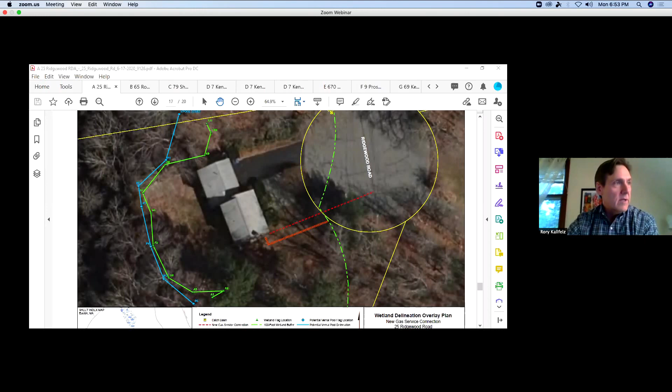I'm not seeing anything, so I will make a motion to... oh, actually Dane, I assume you want us to close and proceed? Yes, please. Okay, so I'm gonna make a motion to close and issue permit for work in order of conditions for 25 Ridgewood Road.

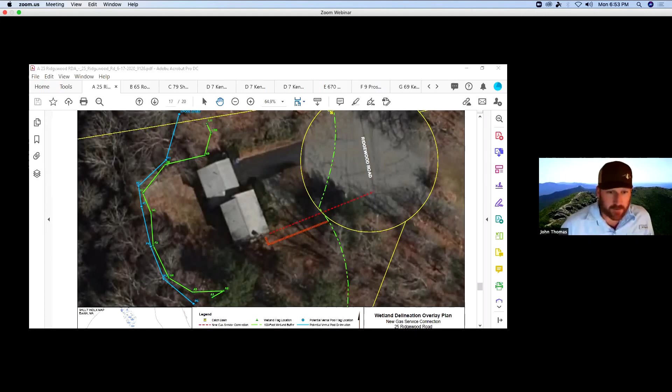Just looking at the staff report to make sure. I'm going to correct you, Rory, and say negative determination. Ah yes, thank you. So make a motion to issue a negative determination of applicability for 25 Ridgewood Road, as proposed.

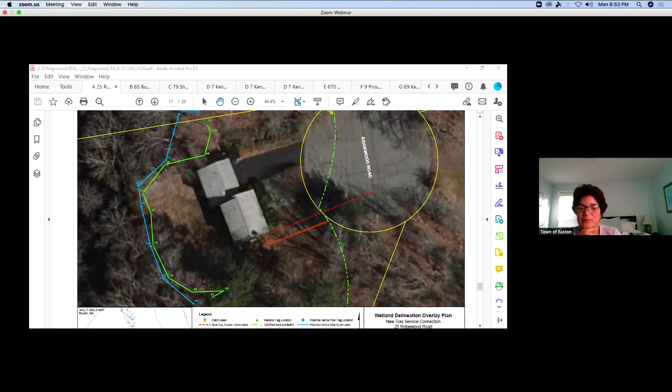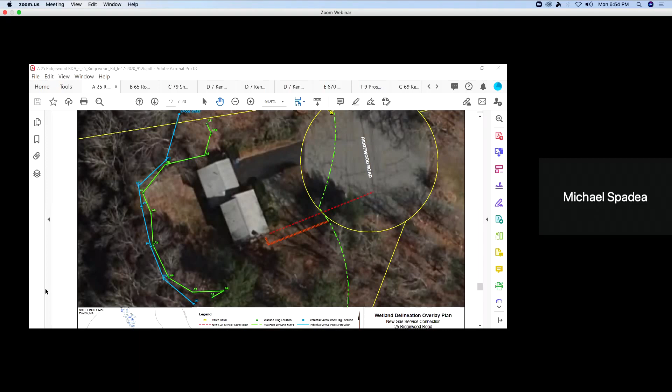Thomas, second. Kallfelz, aye. Spadea, aye. Thomas, aye. Thank you. Thank you very much.

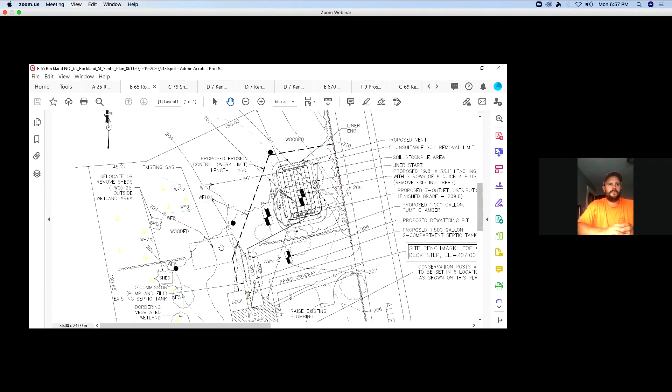That erosion control will contain any migrating materials, preventing it from getting to the resource area. We've also got notes for proposed dewatering areas on our test pit next to the driveway, and we show detail for that on the plan. We've also shown, I believe, a total of 6 conservation posts around the existing tree line in the backyard, mostly, with notes in our standard details listed on the plan. Pretty straightforward septic repair here, everything is outside of the 50-foot buffer. That's all I got for you, I'd be happy to answer any questions.

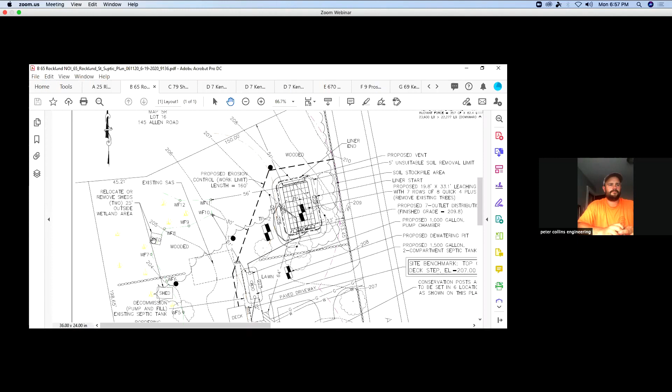So I think there's a note here about 2 sheds that are actually in the wetlands. So the homeowner knows that those need to get relocated. I believe they do, but we'll make sure it happens. Yep. Okay.

Let me let you know for the record that the abutter notifications have been posted to the online application for all of them tonight. Okay. Does any of the commissioners have any questions?

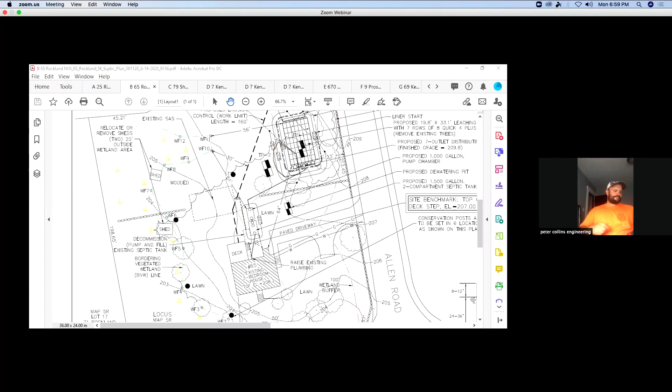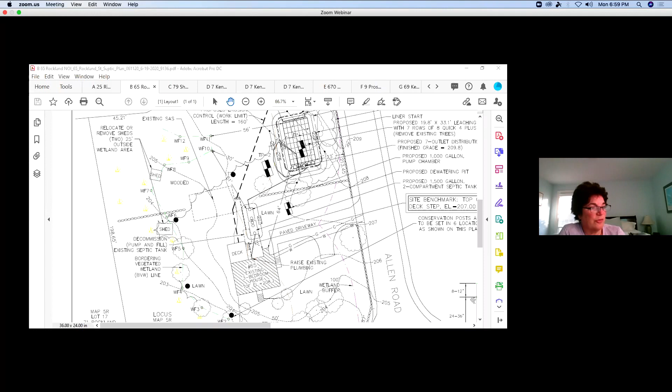I'm going to take a second, while you're watching the list, to note that in the wetland biologist report, she commented that the area of wetland coincides very closely with the lawn, as you can see here in flags 2 through 5, 6. So I'm recommending a condition that any future application shall confirm the wetland boundary by evaluating the soils.

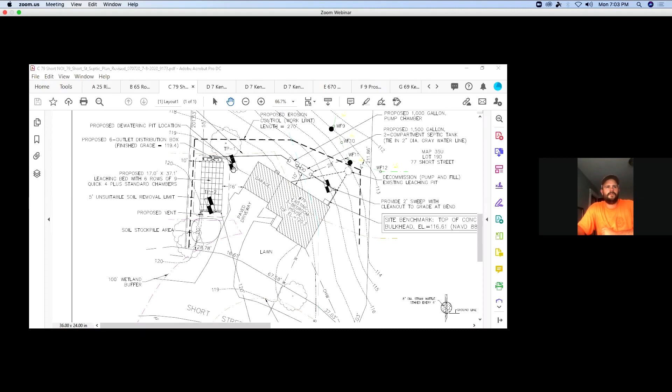With this one, obviously we're kind of contending with the lot lines as well as the house setbacks, but most of all, staying away from the resource area. As proposed, our tanks are located inside the 50-foot buffer. Based on the existing plumbing and the topography, we had to locate the tanks behind the house. Maintaining the minimum 10-foot separation to the foundation, we're kind of sandwiched, and this is where the tanks have to go. It's kind of the only place they can go.

The field, we were able to push a little bit further away from the resource area into the yard. That also helps us out with the grading of the system. There won't be any change in grade over the tanks or the leaching area. All disturbed areas are existing lawn, and they're going to be going back to lawn afterwards. So how it's going to look after the project is exactly how you see it today.

With the exception of a new, I believe it's a stockade fence along the western lot line. I believe that's already in place as of last week, it was under construction. So the installation of that fence is also included in the application. To protect the resource area, we've provided erosion control around the entire project, paralleling the lot lines and going around the entire rear of the house. We have our standard details for that, as well as our conservation post locations, dewatering pit locations, and details shown on the plan.

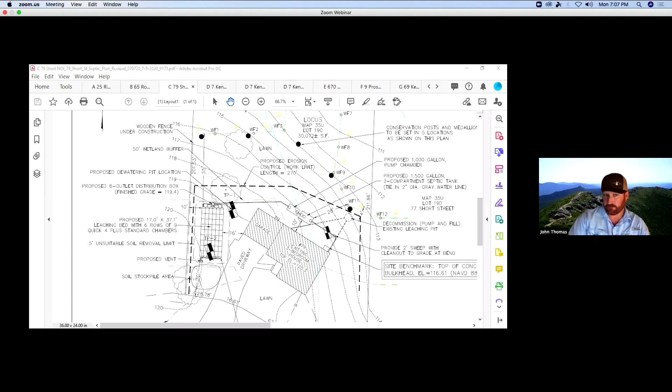And while I get you, I know we have 3 certificates of compliance later in the evening. I know one we are requesting a continuance. Do I need to stick around for Kevin's Way or Summer Street, or are those pretty straightforward? I don't expect you to have any issues with those.

Okay, Andrea, any comments or concerns? No, that'd be fine, I appreciate you continuing 9 Prospect. Okay, alright, if you're all set, I'm going to sign off then.

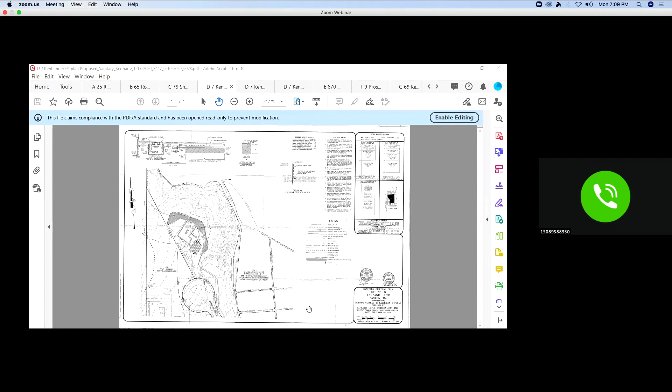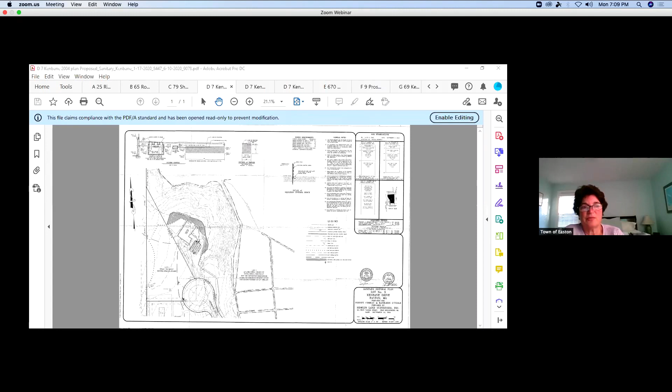Andrea, I'm for 670 Washington Street, the next one, Mike Koska. Thank you. Hello, can you hear me, Ann? Oh, there we are, here you are. Are you here for 670? No, I'm here for 7 Kenbane. Okay, hang tough, we'll bring it up. No, that's what we're doing now. We're doing 7 Kenbane. Okay.

Okay, so I have a bunch of plans already loaded here for you. What's your first name again? I'm sorry, oh yeah, my name is Ben Dowling. I'm an attorney, I represent the Camus O'Toole Family Trust.

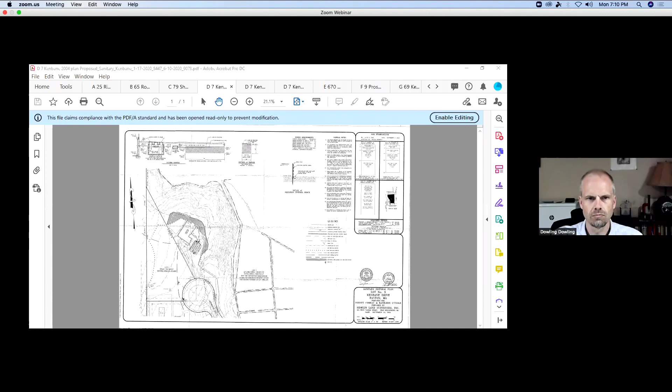Great. We're here on a notice of intent for 7 Kenbane to bring the property into compliance with a notice of intent from 2004. So just to give the commission a little perspective here, the project was originally from 2004, and there was a permit issued, an order of conditions. There was a restoration plan in place, and I don't think they ever closed out the permit, and then they've gone to issue a certificate of compliance, realized they were out of compliance, and so they've come to us to try and get back in compliance with a notice of intent.

So that's why they are here today, knowing that they're out of compliance on a couple of things, and we will talk about what those things are and how we can get them back in compliance.

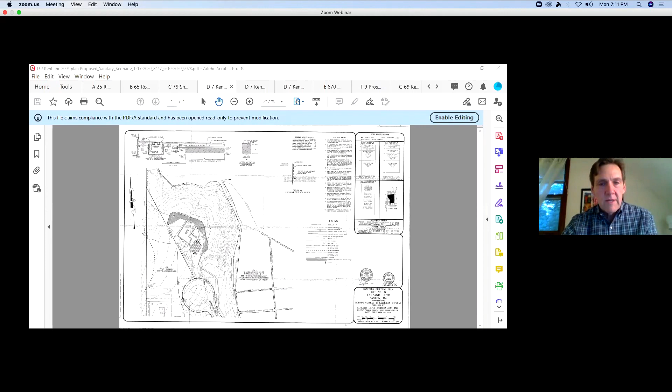So Ben, why don't you tell me what you want to show, what you want me to have up on the screen? It's up to you. I have the original as-built from 2004, the original replication plan, and also the proposed - there's a plan that's been issued now with the current conditions. Great, thank you, that was a very good, concise summary of why I'm here. I think maybe we can focus on the as-built that you have up now.

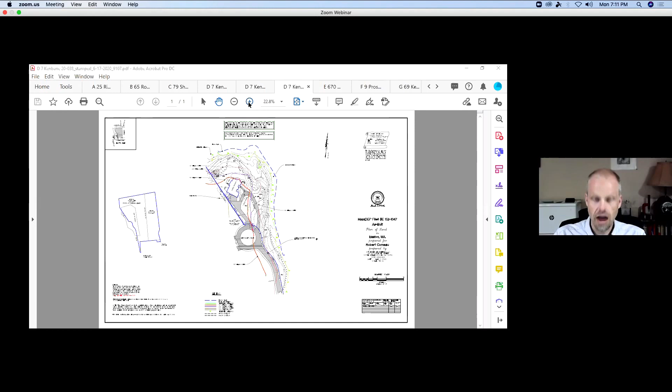Sure, in terms of the areas that are out of compliance, there are some features on the plan - if you zoom in a little bit more, there's a shed and a gazebo that are both on the resource area side of the 50-foot wetland buffer.

And yeah, you're right on where the gazebo is, the shed is to the north. Keep going a little bit there. Yep, there's the shed, there's a water garden to the left of the shed, and there's also a piece of the driveway, and then there's also lawn. Okay, and so the gazebo has been removed at this time.

Wow, that's my understanding. The plan would be to move the shed, obviously outside of the 50-foot buffer.

The proposal would be to make sure that what is happening on the ground is consistent with the original restoration plan, which focused on an area to the south, down in that other direction, all the way towards the bottom, right where there's a lawn. That's where the area of the original restoration was. So we would make sure that area complies with the original restoration plan.

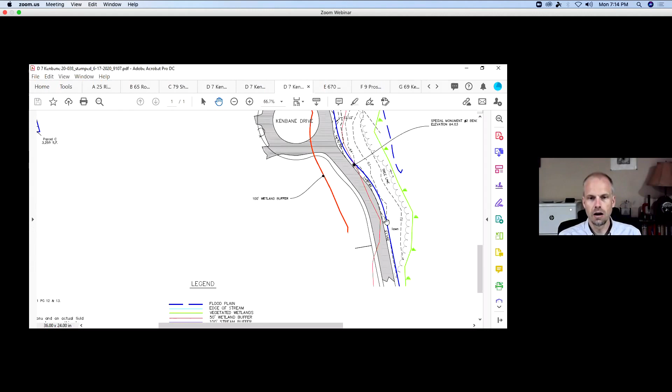And then in terms of the lawn and the water garden, sorry, the proposal would be to abandon the water garden. We're open to guidance from the Conservation Commission on this, but abandoning the water garden seems like it could be the best thing to do here. Again, we're open to your input on that.

And with regard to the lawn, we would propose to have the area behind the 50-foot revert to native vegetation and plantings. The preference would be to allow it to revert, but if there were a more affirmative step you would like us to take, we're open to that as well. So that's broadly what we're coming to you with.

There's a lot there. My understanding is that the DEP has not issued a file number for this yet, so you would not be in a position to vote on this tonight. If we can get on the same page tonight, what I would propose is that between now and the next meeting, hopefully when there's a number and you'd be in a position to vote on a new order of conditions, we will put this plan we're going to develop together in writing so you could vote on it at that time.

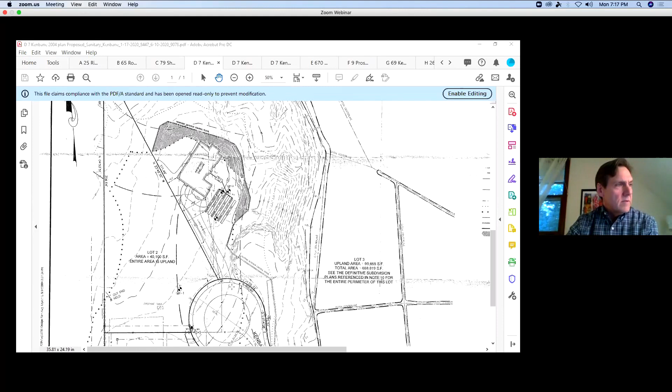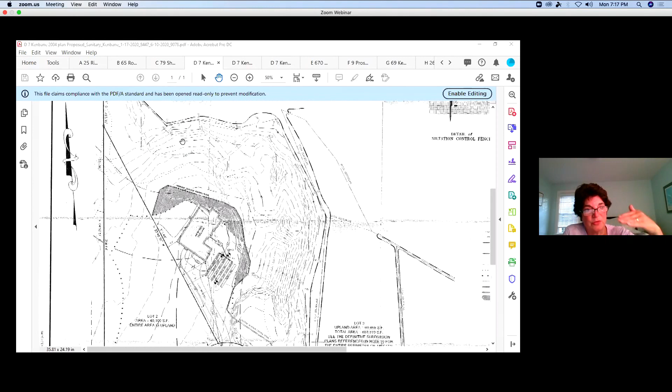Also note on this plan that this siltation fence line is relatively close to the 100-foot stream, 100 feet from the stream. If you were to push your plan a little bit so we could see the north, you'd see that there used to be cartways and stuff down there.

I bring that to your attention because there are two different conditions in the 2004 decision that specifically notified the applicant landowner that there's to be no disturbance beyond the limit of work without further applications.

So I think part of the challenge here is that a significant portion of the area outside the limit of work has been converted to lawn. The notice of intent here, as proposed tonight, is to return it to lawn up to the 50-foot buffer, when the original condition was to not have it extend beyond the actual erosion control at the time, which is closer to the 100-foot buffer.

So that's one challenge. The other challenge is, you know, you talked about the water garden and the shed being moved, but also this driveway. So, is there any input from the commission on what kind of direction we might want to give Mr. Dowling and his client?

I have some other concerns that haven't been discussed yet. It looks like part of the driveway is currently on the septic system. It isn't, it looks like it, but I checked. No, the driveway access to the septic system is through a manhole cover on the driveway. Okay, my mistake.

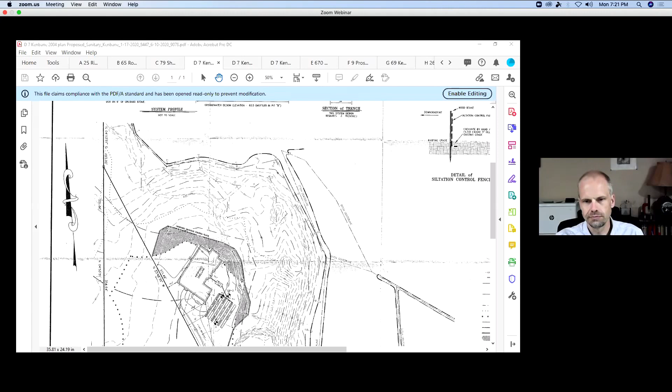I wonder, as you point out, there's this substantial driveway structure that does not appear on the original plan. And I wonder, talking out loud as I say this, if removing that in some way would further the goal of protecting the resource. I'm talking out loud when I say that. Would leaving it as is be less intrusive than going in there and picking it up?

That's kind of how I was feeling. I feel like I'd leave it as is instead of tearing it all up and disturbing it. But I don't know, maybe John or Rory can speak differently on that.

And they did a little bit more work. I think maybe a little bit more mitigation to account for the additional impervious area. It's a big loop, a big green space in the middle of that driveway. Yeah, it is. It is a lot.

That's huge. I think certainly in order to include the driveway in the notice of intent, we'd have to know what the increase in impervious proposed would be, so that we can understand that. I think as John's proposing, in order to offset that, there may be some additional restoration plantings required beyond doing the original restoration planting on the southern side of the property, plus the return of the lawn that's inside the 50-foot to natural state. There may be additional work that's meant to be done here.

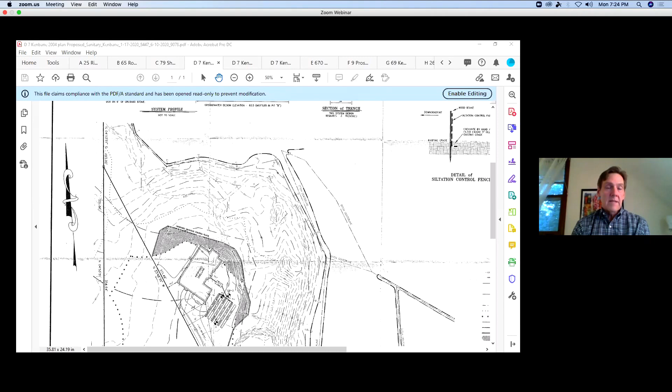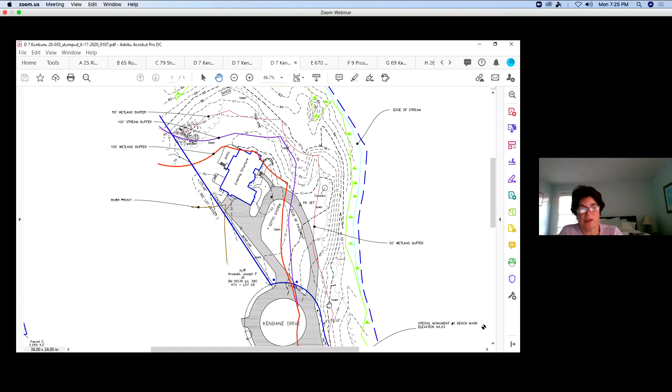Can we go back to the as-built conditions? There's a few areas where lawn comes close, you can see the red line, the lighter red line is the 50-foot. And then there are a few sections where the lawn area comes really close to the tree line, that wiggly line. And there's an area where you're well in, and he's getting closer now where the gazebo is well in the 50. And then down on Kenbane Drive, you've got plenty of lawn.

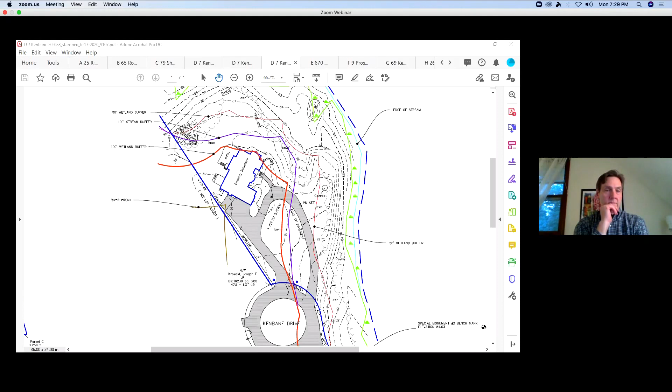So are we looking for a 1-to-1, a 2-to-1 replication here? 2-to-1? Any thoughts from anybody? 2-to-1?

I think it's going to be important to see how much room they have to work with, see the contiguous restoration potential areas along the driveway, and see how much you can build on the existing one that they were proposing, to see what the size of that was, and then see how much room you have to work with. It'd be nice to have one large restoration area rather than splitting them up into two.

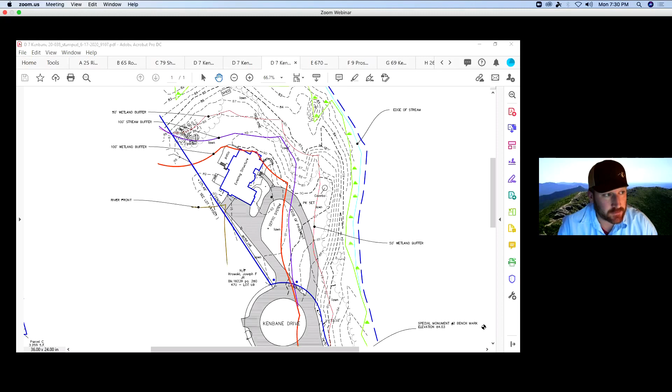So on the existing plan, the restoration area is identified between flags 23 through 25. It doesn't have an area listed, but perhaps in a revised proposal, attorney, you can give us the areal extent of the LEC proposal and then add to that.

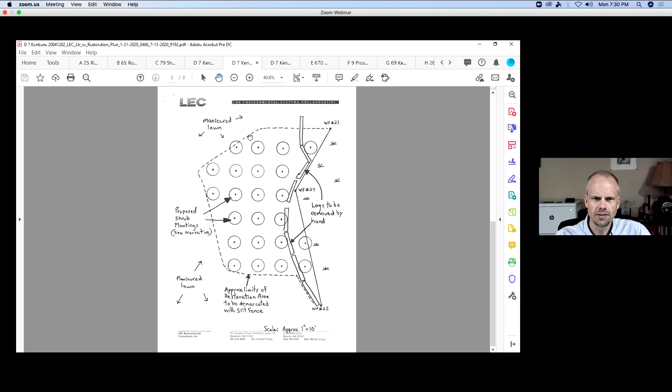Okay, now I was just listening to Mr. Thomas's comment, and I'm wondering - talking out loud here - should the plan be to have the restoration area be contiguous with the old restoration area? We find that they're more successful when you have them all together in a group, rather than trying to sporadically put them in tiny little spots along the property. It's also easier to manage them at the same time. So maybe the plan can be to extend that one.

Yeah, and if it allows it, you might have to do two here. I'm just saying, if you have the availability or space to do one larger system off the original one, then that's what I would suggest doing.

Okay. The area that the LEC plan is in is where the lawn is closest to the wetland line.

I actually haven't been out to this site, so I don't know if there's any potential invasive species on the property, or anything that could potentially be incorporated into a mitigation plan as well. The last thing we want to do for a project like this is remove trees. It looks like the wetlands are interior of the edge of woodlands, so you're probably going to have to look at what sort of species you could put in the understory in the woodlands, and also what you can extend within the existing lawn.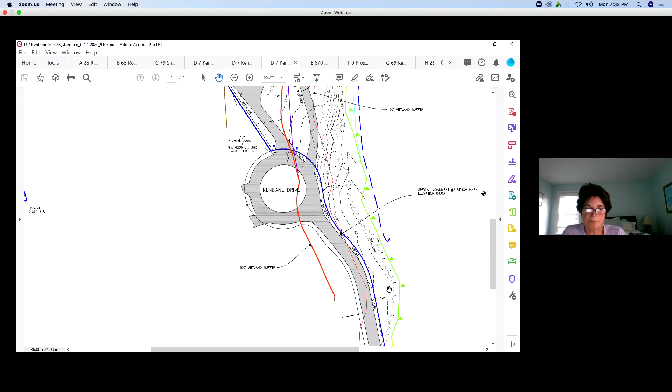Since the restoration area has been cleared out and mowed, whether, as Mr. Attorney Dowling said, maybe the wildlife ate it at first, it's now all lawn. When the decision was made in 2004, this area down here was disturbed, and that's why they put the restoration planting in.

Now, if you go out and take a look at the site, you may find this is the right spot, or maybe it's the spot to the north because of the extensive wetland area. Which one is closer? Would the commission be open to having a wetland professional or one of our better landscape professionals take a look at the site and give a proposal for where the area should be?

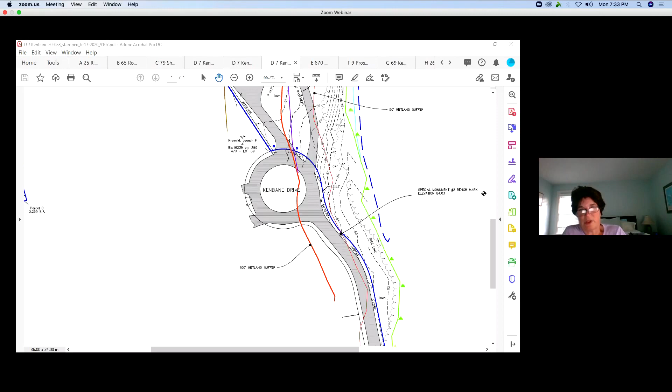I think that's a great idea. I'm open to that. I think the applicant needs to put forth a pretty good plan here to have that driveway be something that we would permit. So you can take that for what it's worth and determine what you want to do. The better the plan you put before us, the more likely we would permit it.

Okay, understood. So just procedurally, will you table this, or hold it? We'll continue this and leave it up to you. We can continue it tonight to our next meeting, which is two weeks off, currently, although we may move that to three weeks off, that may not be enough time for you to get out there. We could move it to the meeting after that, if that helps you.

You tell us what time frame you think you and your client need, and we can continue it to that. We tend not to try and perpetually continue it, but we want a good sense of when you can get it done, so it's not just sitting on the agenda. We can't vote on it tonight anyway, and we could vote with missing information, but that's not how we operate.

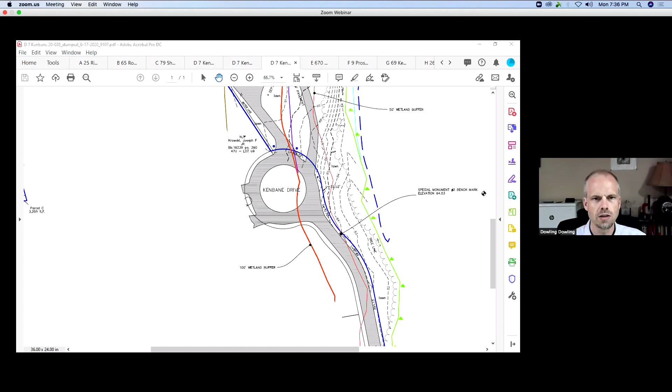So we'll continue to the next meeting, which may be this 27th, or it's currently scheduled for the 27th. If you need to push it off again, we'll push it off again. Okay, sounds great. Do we have any public comment for 7 Kenbane?

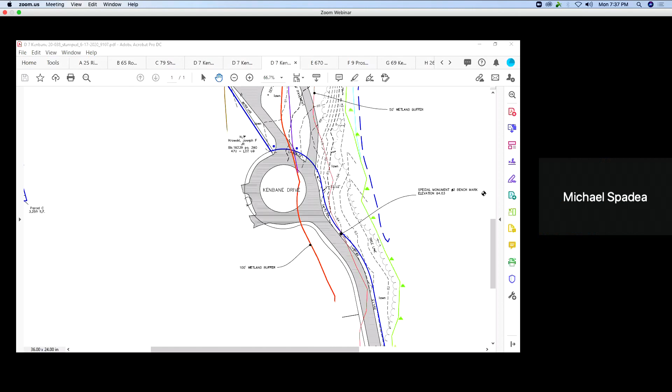Okay, seeing none, I'm going to make a motion to continue 7 Kenbane to our next meeting, July 27th. Spadea, second. Caulfield, aye. Spadea, aye. Thomas, aye. Okay, thank you very much. Thank you, good night, have a good night. Thank you, okay.

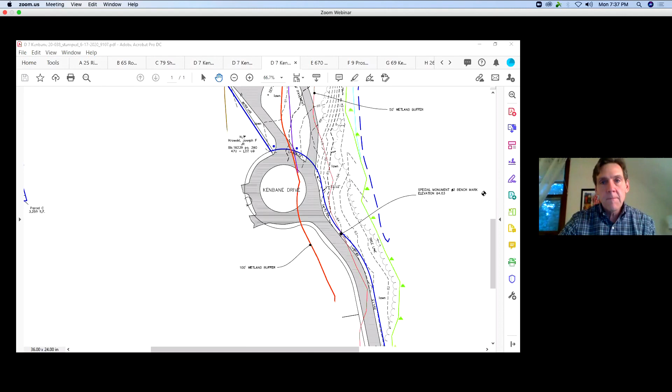So next up is 670 Washington. I think that's this one here. You're 670 Washington, right? Yes, Mr. Chairman, my name is Michael Koska. Okay, welcome, Mr. Chairman, if you want to present at this point.

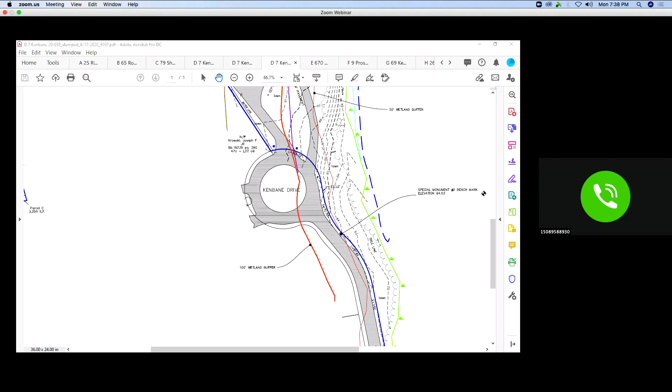Sure, go ahead, we actually have your plan up on the screen if you want to give us some sense. Okay, thank you, Mr. Chairman. For the record, my name is Michael Koska. I'm a registered civil engineer and land surveyor in the Commonwealth of Massachusetts, here representing Mr. Richard Crystal and Frank Tanasso, who are trustees of the Protea Realty Trust at 670 Washington Street in the town of Easton. Their site is located on the northeast corner of the intersection of Depot Street and Washington Street, which is Route 138.

The multi-use building consists of a floral shop and a 2-bedroom apartment on the second floor. The lower level is used to prepare flower arrangements and store flowers in coolers. The second story is the greeting area for clients and display area for the arrangements. And then on top of that is the 2-bedroom apartment.

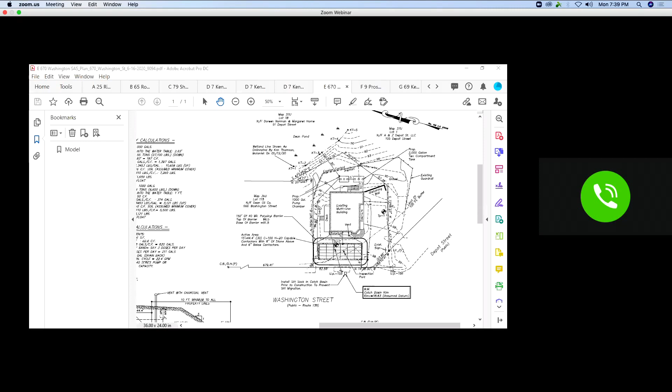We were asked to do a perk test in the presence of the Board of Health. Mr. Mark Taylor was officiating at the site. We did test pit 1 and 2. We found that there was a gas line near test pit 1, so we moved right into the front parking lot.

The plan consists of a 2,000-gallon two-compartment tank into a 1,000-gallon pump chamber. From there, it would be forced to the front parking lot through a 2-inch force main.

The septic system in the front has dimensions of 15 by 44.4 with a 5-foot remove and replace all around, where we found concrete, pipes, rebar, wires—you name it, we found it. And it broke through where I did a perk test, from elevation 54 to 72. So we're removing that material, the dimensions of the system plus 5 feet all around, as per the state code.

Taking care to miss that gas line on the right-hand side, and taking care not to infringe on the property to the north, or left-hand side, as we're looking at the building.

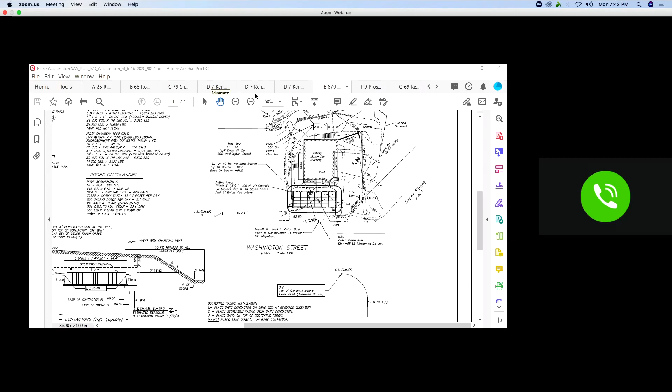It's about a quarter inch between the edge of Washington Street to where the flood zone line is. That's about 125 feet, which is approximately the extremity of the property, where the wetland flags are actually outside of the property, which is owned by Doreen Norman and Margaret Horn, and it's known as Dean Pond.

The floodplain maps also show that there's a dam, showing elevation 96 dropping down to 91. And right where it has the locus, it says Town of Easton 95.4. I do have, from the research that was done on the property, a plan done by Mr. McCann in 1977, registered land surveyor in the Town of Easton, and he shows the dam there. So it makes sense—it reaches a certain level and drops down approximately 5 feet, and the flood zone there is 95.4, probably at the dam crest.

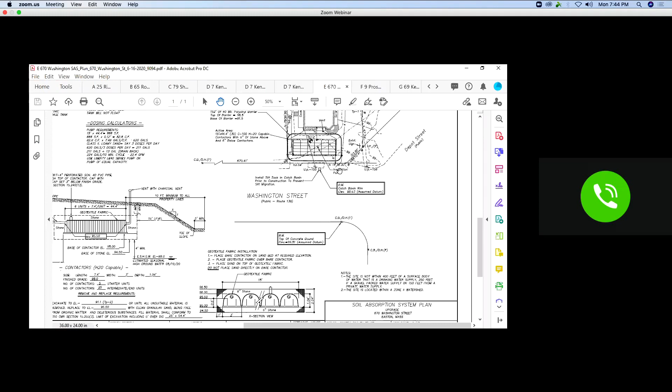So what I'm trying to say is this: even though I'm on assumed datum and not on NAD 1988, I believe that we are outside of the flood zone. However, even if we weren't, I am not proposing any volume increase in that area of the rear of the building.

Let's see, other points - stockpiling. It makes sense to me, members of the commission, that if a contractor was doing this job, there's no room on the site to stockpile, so he'd have to load his truck, take it off site, and keep having a menagerie of trucks until he had to fill the hole with sand, maybe to the halfway point, then continue. So the sand would be dumped into the excavation so he could work further, I would say from south to north.

An impervious barrier was put around the site, although it's going to be below the existing pavement, due to the fact that 20 feet is the minimum distance from a foundation wall to a septic system. We're asking the Board of Health for a variance to 13. As you can see, we're doing the best we can to fit the system into a very small lot, between 6,000 and 7,000 square feet, and hopefully we've done that.

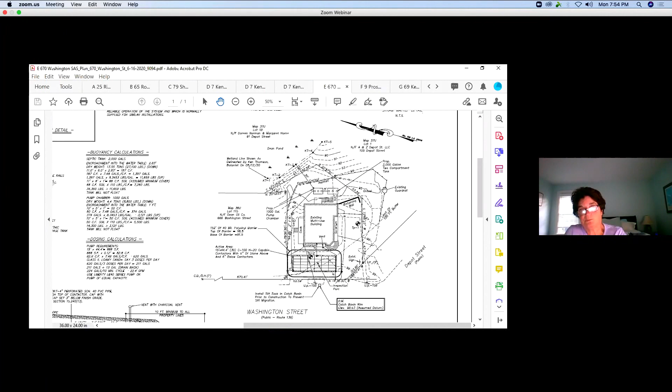Mr. Chairman, that site next door houses Pilling Engineering, and I believe they engineered that plan extending as far as it shows on the natural heritage map, and that it is on NAD 88. I will be more than happy to tie into any benchmark system they have there on NAD 88.

Tie into my benchmarks, which are the catch basin, and there's a bound across Washington Street, and do a conversion from NAD 88 to my datum so we can determine what contour that represents on the plan before you. I am not opposed to doing that if it will clarify things. But like I say,

there will not be any change in elevations in the micro topography in that rear area. What is existing there now, the septic tank and pump chamber, is scheduled from 92.5 on the inlet of the tank to 92.25, and the pump chamber from 92.15 to 91.90, with existing grade about 94.5 there. So the tanks, or the risers, are to be brought to grade, but not popping above the existing topography.

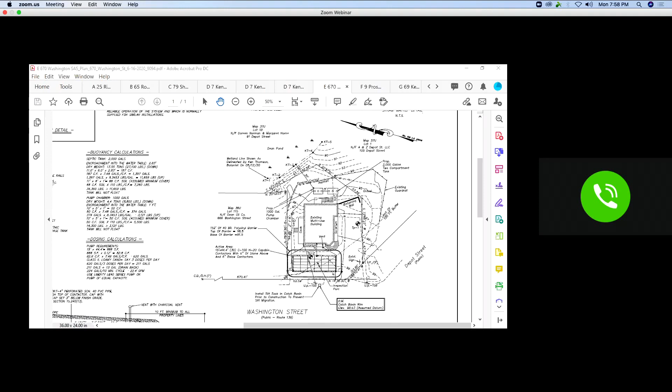Okay, so next up is 153 Chestnut Street, which is an ANRAD that's been on our list here. The application remains incomplete, but we've had a conversation with the applicant, and they're requesting, reasonably so, to continue this until after the state of emergency. There are some financial considerations making it a challenge at this time. I think it makes sense for us to simply continue this until after the state of emergency, and at that time we can revisit how to get it back on the agenda to issue this ANRAD. It's ready to go, we just can't do it because the application isn't complete. So anybody have any questions?

Sounds good to me. Anybody in attendance have any questions? 153 Chestnut. If I could clarify, what you're suggesting is you're continuing to the first meeting after the state of emergency is lifted, at which point you'll decide if it needs to be continued further? Correct.

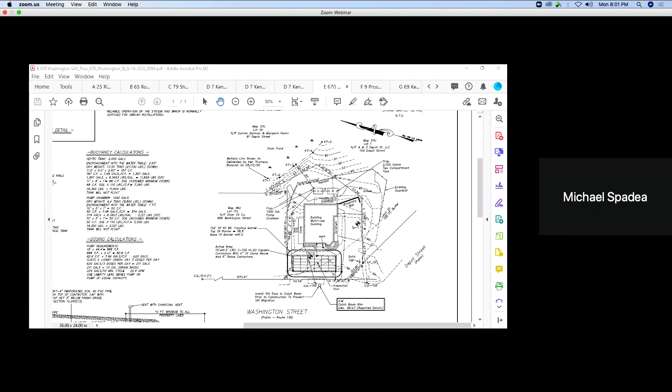Make a motion to continue 9 Prospect to July 27th. Spadea, second. Caulfield, aye. Spadea, aye. Thomas, aye.

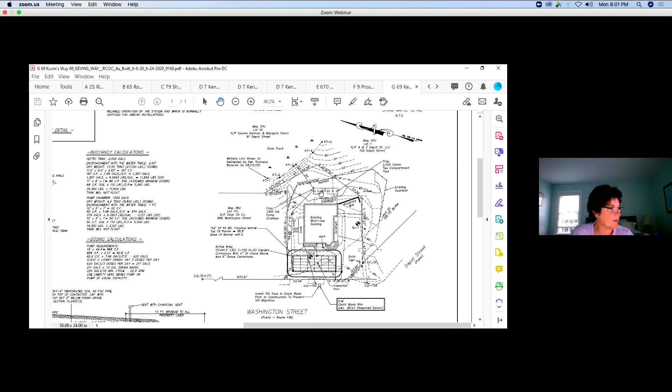69 Kevin's Way, so this is a certificate of compliance. Andrea? Yes, it is a certificate of compliance. I just noticed I need to go to another file to get my staff comments. This is a septic upgrade by our friends at Collins Engineering. The work has been completed. According to Commissioner Kallfelz, the ground is stabilized and there are no continued conditions on the application, on the decision, except for number 42, perpetual condition for any debris in a wetland should be removed.

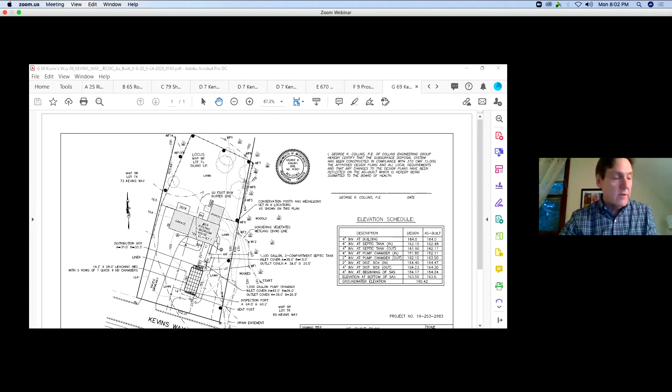Anybody have any questions on 69 Kevin's Way? Any public comment on 69 Kevin's Way? Seeing none, make a motion to issue a certificate of compliance noting perpetual condition number 42, no debris in the wetland. Thomas, second. Kallfelz, aye. Spadea, aye. Thomas, aye.

You got one in on you. I guess so.

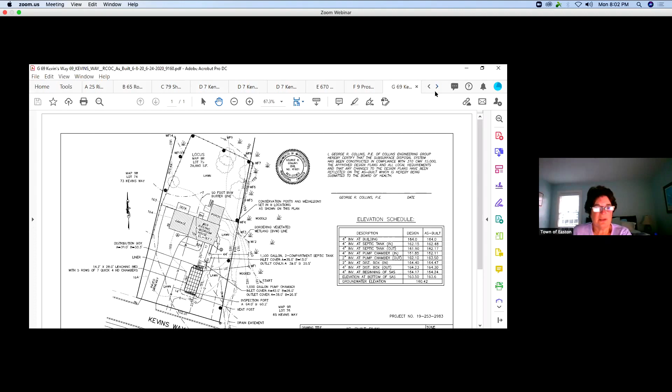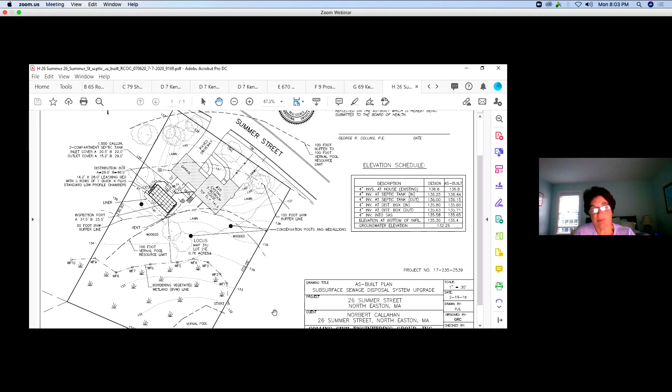26 Summer Street, another certificate of compliance, another septic repair. This is a property adjacent on the south side of Summer Street, adjacent to our Metacomet properties. I was at this property last fall after the work was done. The order of conditions was issued in January, and the area has been stabilized. I understand from Commissioner Kallfelz the only continued condition is there are no perpetual conditions. This one does not speak to no dumping in the wetlands. So a fully compliant site from my understanding.

Any questions from the commission? No, it looks good. Same. Any public comment on 26 Summer? Seeing none, motion to issue a certificate of compliance for 26 Summer Street. Spadea, second. Kallfelz, aye. Spadea, aye. Thomas, aye.

Okay, 19 Lullaby Lane. We're going to continue this one as well. This is the one we've had in front of us a couple times here. The engineer asked us to continue it. Did he give us a date? He did, I just don't remember what it was, Andrea. He said the next meeting. I don't know that he has anything new to prepare to present, but he did ask for a continuance.

So I'm going to make a motion to continue 19 Lullaby Lane to July 27th. Thomas, second. Kallfelz, aye. Spadea, aye. Thomas, aye.

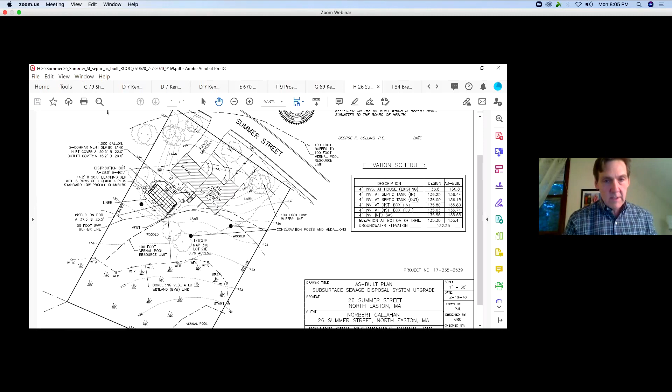Okay, so next up is 34 Brentwood Drive. This is the unpermitted dam structure. Just before we start, I know there are a lot of attendees waiting to hear this and maybe speak, so give us some patience as we go through this project and the report from the engineer. We have some new information tonight that we want to share, so we'll go from there.

Andrea, we have to bring in Attorney Sciacca, going to move him up to promote as panelist, and then Scott Rogers is also getting promoted to panelist, and he's got two coming forward. There we go. Okay, thank you. You got the colorized picture there? Yep.

So I don't know which one of you guys wants to speak for the applicant.

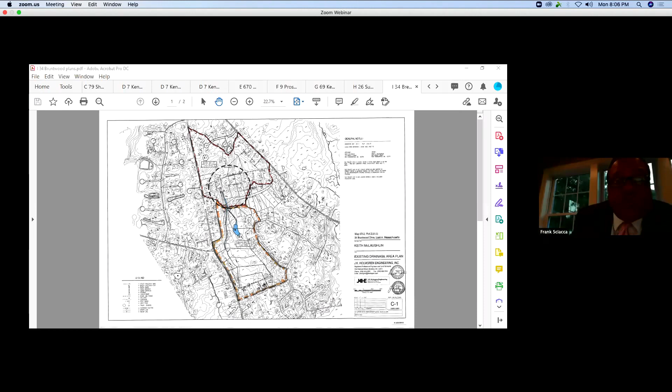I'm just trying... This is Attorney Frank Sciacca. I represent the applicant, Mr... Chairman, members of the commission.

First of all, I'd like to thank you for your patience on this matter. I know it's been a while. I've studied the history of it. I guess it started with a letter of inquiry in October of 2019, and it fermented into an order on January 17th, 2020, asking for further information regarding permitting or removal of the structure.

I know at some point in time, my clients, Brian and Jean McLaughlin's son, Keith McLaughlin, appeared and suggested that the boards would be removed for moving the structure, which is still our position. Our position is we'll do whatever the board would like.

As you know, and as has been represented, these two boards and this structure go back 30, 40 years. To that end, I believe there was a replacement of the two boards at some point in time. But I would hold a little bit in terms of calling it a dam. It's very evident that water pretty freely flows under the boards, through the boards. I don't know if it flows over the boards. I haven't witnessed any of that.

With me today, and pursuant to the commission's request, we hired John K. Holmgren, J.K. Holmgren Engineering, to do a study on this and to see whether the dam has any profound effect on the surrounding area. That study was submitted to the board, and I think it's been made part of public records, if I'm not mistaken.

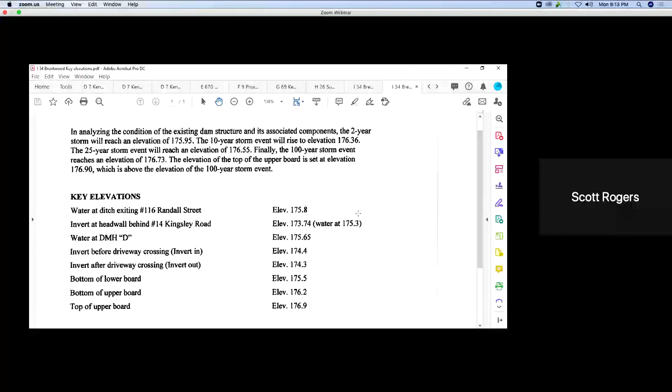Two 8-inch boards. So I want to go through some of the key elevations with you as they relate to what we're talking about here. The water at the ditch, as it exits 116 Randall, is at elevation 175.8.

The invert at the head wall, which brings you to that 30-inch corrugated metal pipe behind 14 Kingsley, is 173.74. It should be noted that the water elevation was measured and was at elevation 175.3, which, doing the math, is about 1.5 feet underwater. We're talking about the end of June, July here, and there's a bit of a dry spell going on. So that indicates there's water in the system 1.5 feet during a dry spell. You can kind of take that from there.

The water elevation at drain manhole D is at 175.65. The invert in, at the driveway crossing, is 174.4 - those are those two 24-inch pipes. The invert out, on the other side of the driveway crossing, is 174.3, which is a tiny bit lower.

The elevation of the bottom of the lower board is at 175.5. The bottom of the upper board is at 176.2, and the top of the upper board is at 176.9. Just for reference, the ground elevation at drain manhole D and Kingsley Road is approximately 181.

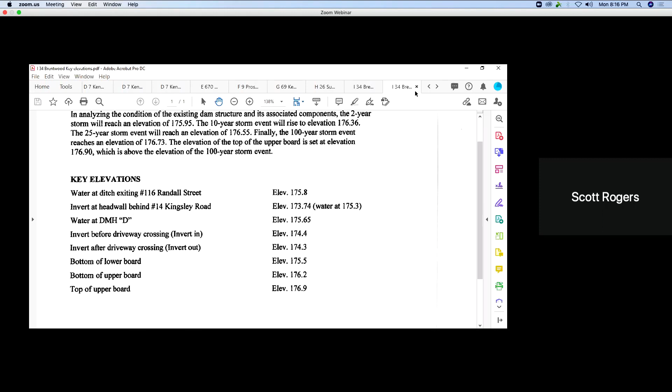The second watershed is to the south, shown as E2 on the existing watershed map. It's mostly wooded and bordering vegetated wetland areas. There are some areas of houses and driveways, but mostly it's a large wooded wet area.

When you analyze the removal of that upper board, because we have a large watershed to the south, E2, and that structure can handle the 100-year storm, removing the upper board results in only a 0.026 foot increase, which is negligible. Removing the second board would result in an additional 0.026. So the net result would be 0.052 feet.

For reference, 1 inch would be 0.083, so you're talking about roughly a half an inch of additional water. When you look at that amount, which is negligible, you also have to consider that there's a large watershed to the south where that additional water runoff would be absorbed.

As I mentioned, it's a large watershed - there are hundreds of trees, thousands of shrubs, and an herbaceous layer, which will also decrease that minimal increase. So essentially, the brook or ditch system upgradient to the north would not be impacted by our structure.

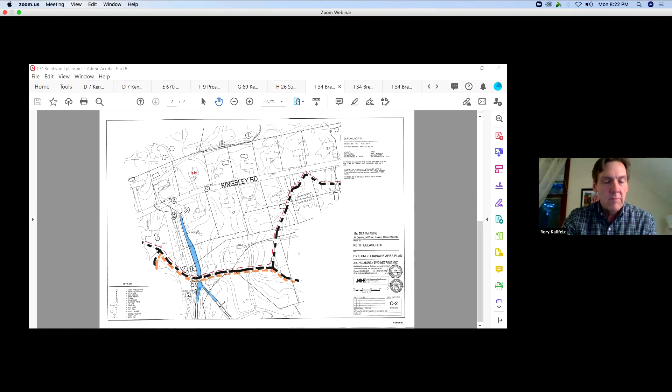So what if the boards get pulled here? Is less water going to be moving down the easterly branch of this? Well, I believe so, but Scott's here. Yeah, that's true. There's also a pond at the terminus of that right-hand branch. So will it impact that pond? It would probably make the pond a little bit better because it's receiving more fresh water into it.

That's a pond that was created as an agricultural pond, correct? That's right. Okay, so...

Is the contention here that whatever increase in flow is more than managed by the entire herbaceous layer in the soils of this existing watershed in E2? Right. It's a small amount of increase, and because the watershed is so large, you'd see no impacts.

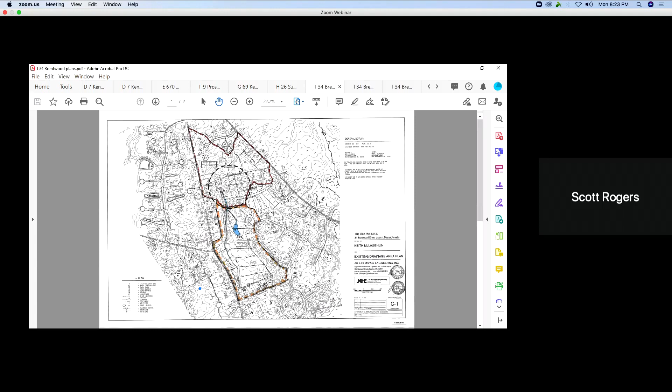Also to that effect, the removal of the boards, or even keeping the boards, has probably had no effect on Kingsley either, because Kingsley is at a higher elevation than where the boards are in the flow of that water. So removing them or keeping them has no effect on Kingsley. The reality of the situation, unfortunately, is that Pheasant Lane may have been built a little bit too low, given the topography of the surrounding area - the entire watershed from north to south flows towards Pheasant Lane.

And as Scott has indicated, many of the manholes - you can't even see the pipes - and those manholes and catch basins were built many years ago; they may even be outdated. The pipes that cross those streets may be too small. There's obviously debris in the manholes, so water's not flowing freely through that. So you probably have the perfect storm: topography pushing all the drainage south, manholes that are somewhat outdated and probably unable to handle the water flow, and it's all flowing to Pheasant, which was probably built a little bit too low given the surrounding area.

The fact that people are pointing to this dam, based on everything I've seen, and with Scott here as an expert, makes no sense.

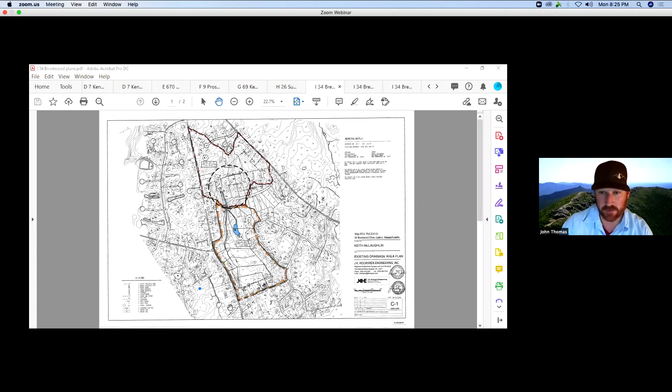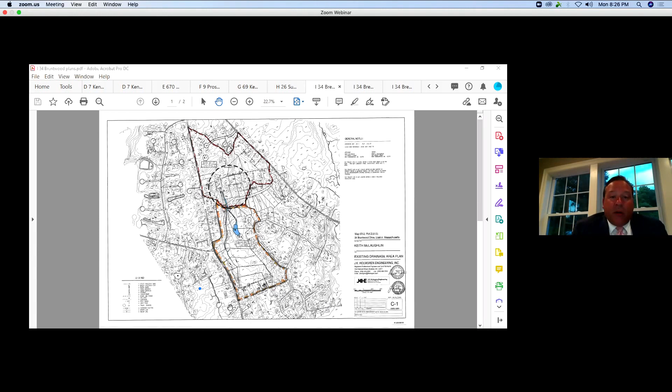I understand. Any other questions from members of the commission before we go to the public? I guess my only question is, what's the purpose of the pond now? Is it still being used for agricultural purposes? No, it's not currently. In actuality, the pond hasn't been used for some time. It was more for skating for the kids on the property than anything else. Horses haven't been kept there in a while.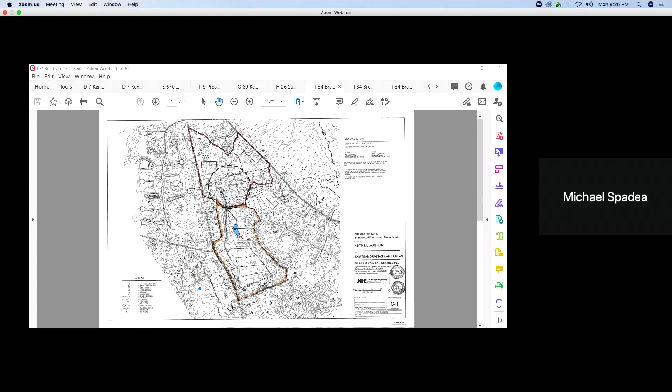So I'm gonna go to the public because I know there's gonna be some questions here. So if you just want to raise your hand, we can elevate you to ask a question. The one thing is I am gonna ask that we try and keep our comments to the point and try not repeat information. So anybody want to go first? Anybody have questions?

Okay, so seeing no... what's that? I was just checking to make sure nothing was typed in. Yeah, I don't see anything in the Q&A box or anybody raise their hands. I'll give it another 20 seconds here for anybody to make a question, and then we can determine what to do.

I unmuted those that I know are here for this purpose, and so if they want to speak, they can just speak up. So Attorney DeLisi and Erin Hooker, you're both here, so if you want to speak. And Mr. Thomas too. Yeah, hi.

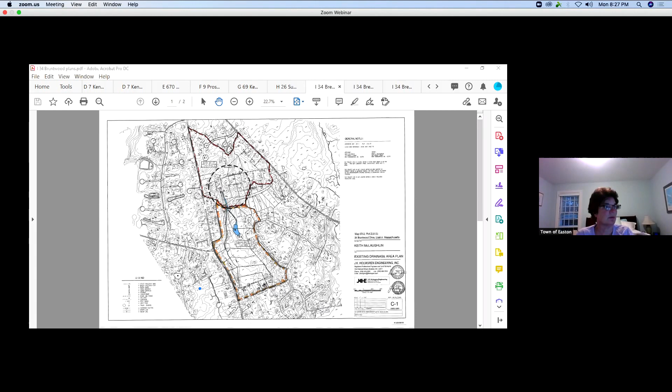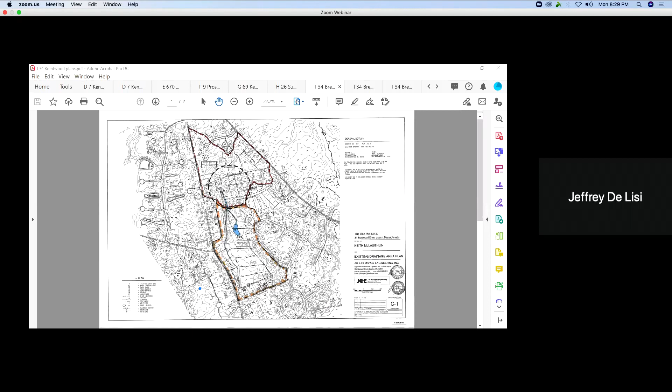Yeah, so this is Jeff DeLisi. I was hedging whether I would speak at all. I think this matter has been, we've been talking about this for a while. We now have scientific data, which we're encouraged about. I guess the one thing that jumped out with the data to me was the discussion about the maintenance of the manholes and the pipes, and I think it would be encouraging if the commission were to seek to encourage - I know it's not your task - an inquiry into DPW to kind of clean that out, I think probably would make this entire system work the way it was designed. Right now there's something causing some issues up gradient, and it's good to see that pulling the boards would have a negligible effect down gradient. So it seems to be a win-win all the way around. I'm not going to take up any more of the commission's time. Thank you. You're welcome.

Mr. Thomas or Ms. Hooker? Give you the opportunity. Okay, so they're just here as observers. So my thought is, I think that it's probably, there's a Q&A here, so before I proceed.

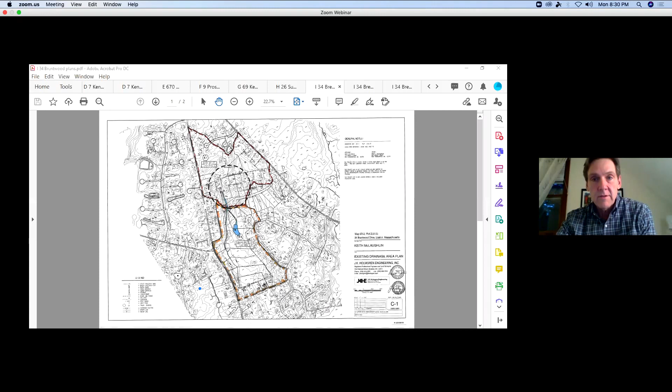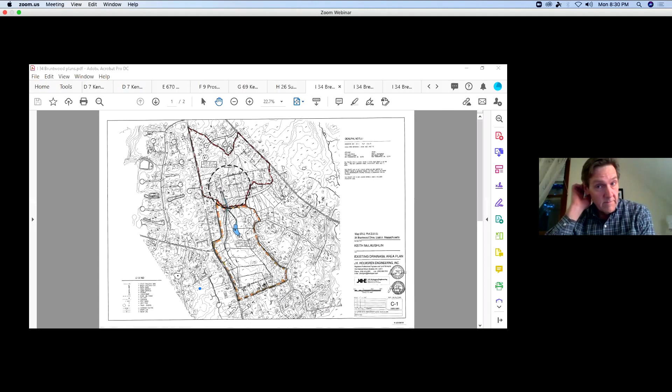Would your elevation certificate help determine how to proceed? I assume that it would. If you have additional information you want to provide, I'm happy to take that, Ms. Hooker. So if you want, you can unmute yourself and give us some sense of what you have.

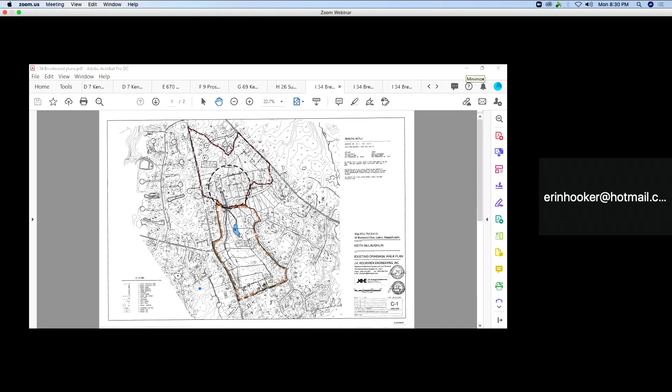There you go. Hi, sorry, I was driving home with my son. I do have an elevation certificate, and hearing those numbers, we are so significantly lower. That's making me concerned because obviously, like they said, we're lower and we can't do anything about it. I mean, I'm not going to be rebuilding my house anytime soon. And hearing those numbers and seeing what's happened every time we get one of these floods, I'm a little concerned, but I don't really know what to do, because if you pull the boards and we flood worse, we're in trouble. But if you don't pull the boards, we're still flooding anyway.

Right, yeah. I'm just kind of concerned because FEMA has already, they've just changed the elevations as of 2017. And if it gets worse, I'm going to be paying like I live on the Cape - but not living on the Cape. Exactly. But my flood insurance is, if we are, it's getting ridiculous.

Yeah, so is this something that's voted on today? I mean, they have all the numbers, so you're gonna have a decision. I think that personally, I think we're ready to move on this, yeah. Yeah, okay. Okay, thank you.

So I think from my standpoint, I'm comfortable pulling the boards and just having the structure go away, and I don't believe it's impacting upstream, given the impact is from 1,500 feet away. Unfortunately, I think the Pheasant Lane community is in a tough spot simply because they are in a wet spot, and I don't think this is going to make it any worse. I believe the numbers show us that it isn't going to make it any worse. Unfortunately, I believe that is probably the best route for us to go, to pull the boards.